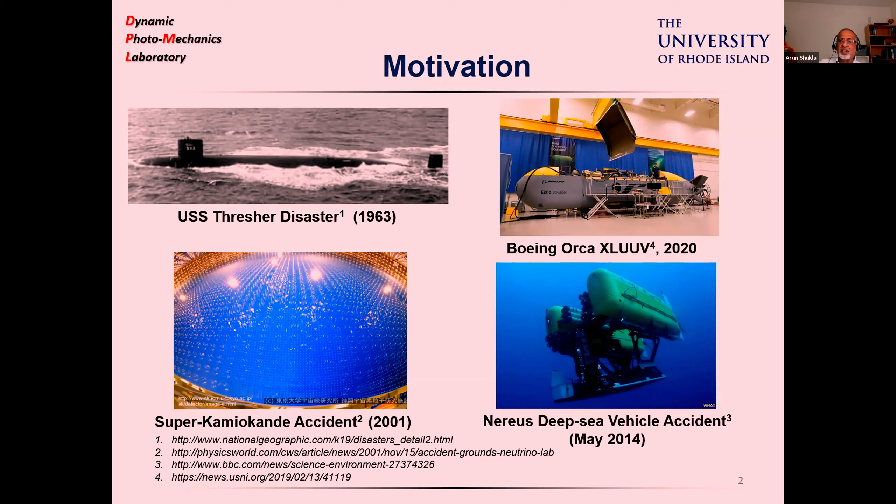Recently there's been a huge increase in activity for underwater unmanned vehicles. This vehicle on top is from a recent contract that Lockheed Martin and Boeing received to build extra-large unmanned underwater vehicles with composite materials. The interest is in deploying these unmanned vehicles underwater, both in terms of forward deployment, where they could be used after some years or right away. We believe that in the next 10-15 years, activity underwater will be similar to aircraft flying all over the place in air—these unmanned vehicles will number in the thousands in the oceans. This dramatic increase requires us to look at the performance of these vehicles from a mechanical engineering, mechanics point of view.

So the outline of my talk: I'll just talk briefly about this collapse problem, the implosion problem, and the experimental techniques that we are using, and then give you some examples of this implosion. I also want to show you some other examples of work we are doing recently, all dealing with underwater activities. I'll try to be simple and brief.

A lot of this work is published in literature, so if you want to know the details, you can look at them. I do want to mention that for the younger generation, there is a lot of scope in this underwater type of activity. So if you want to focus your research in that area, I don't think you will go wrong.

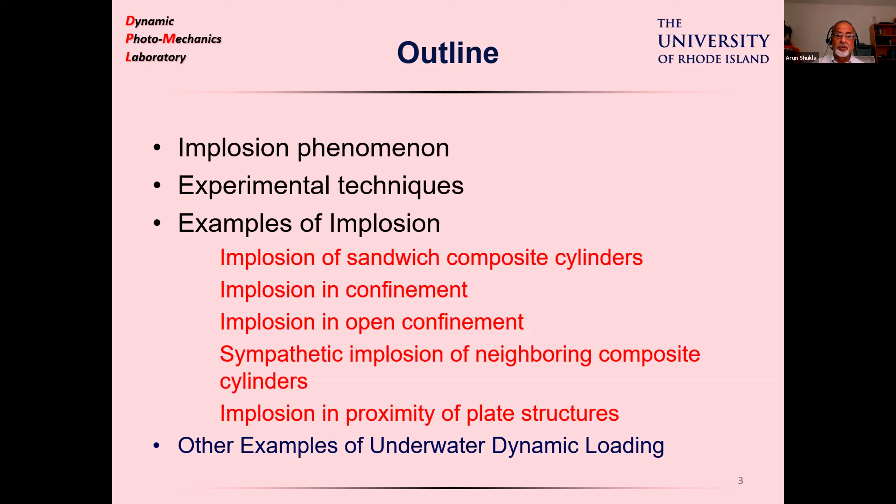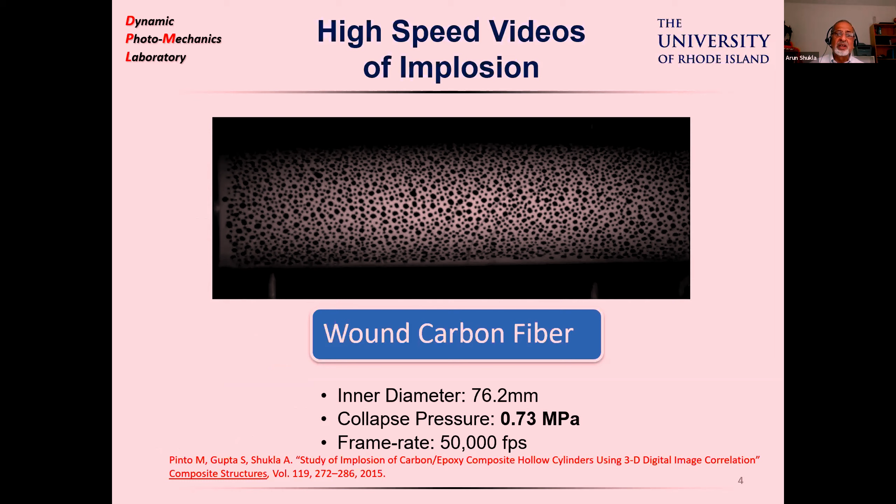So this implosion phenomenon, what you see in this movie, you'll see this tube here. This is a composite material tube, a carbon composite tube. We are immersing this in water at a certain depth, and it implodes, collapses. You'll see this implosion process here.

So this tube collapses in mode 3. You'll see 3 lobes and 3 valleys here, and it goes through catastrophic damage and deformation. In this process, it releases a pressure pulse that could be detrimental to neighboring structures, tubular structures, or plate structures next to it.

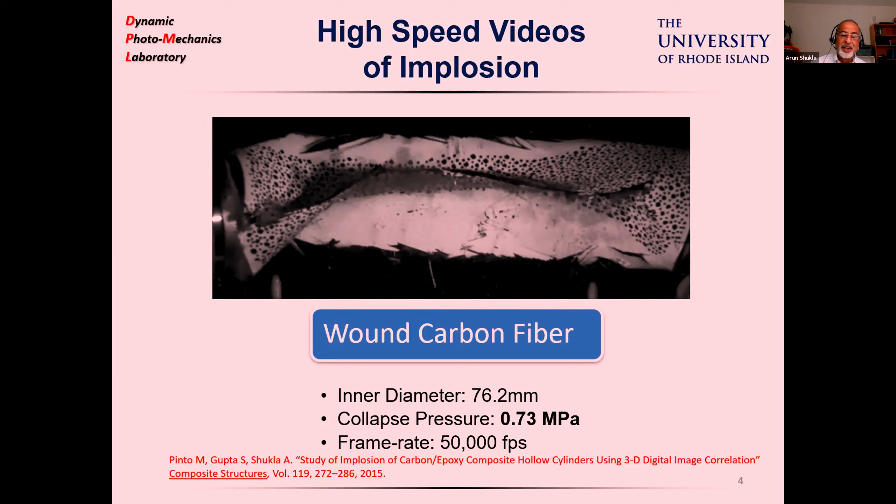I also want to tell you that it looks very dramatic here, but later on, after the experiment was over, the tube rebounded back to its almost original shape. So looking at that final shape of the tube, one would not feel or imagine this catastrophic nature of the collapse process.

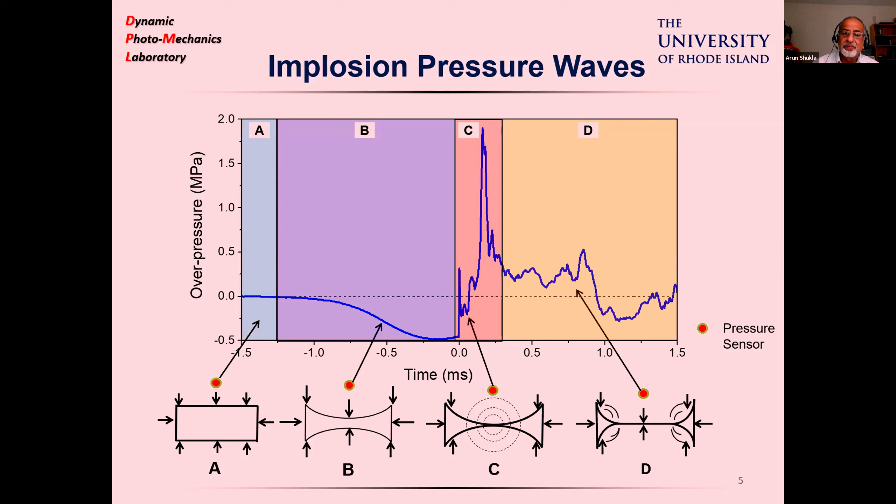There are very, very few studies in this area. I think this is probably the first one of its type on metallic cylinders, and we have done some more on composites. In glass, people have seen this phenomenon before.

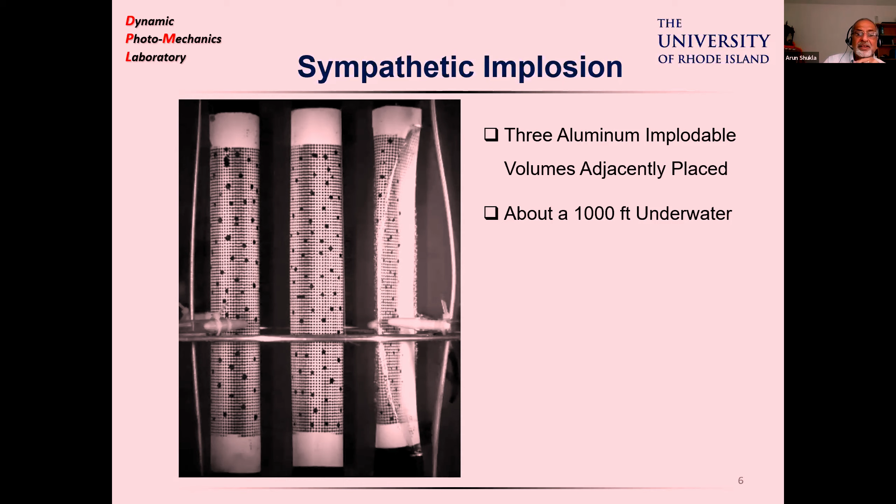So let me run this movie for you. Here you'll see this is collapsing now. You see this tube begin to bend here. And then because of that, this tube collapses, the shock wave propagates, and then the third tube is going to collapse.

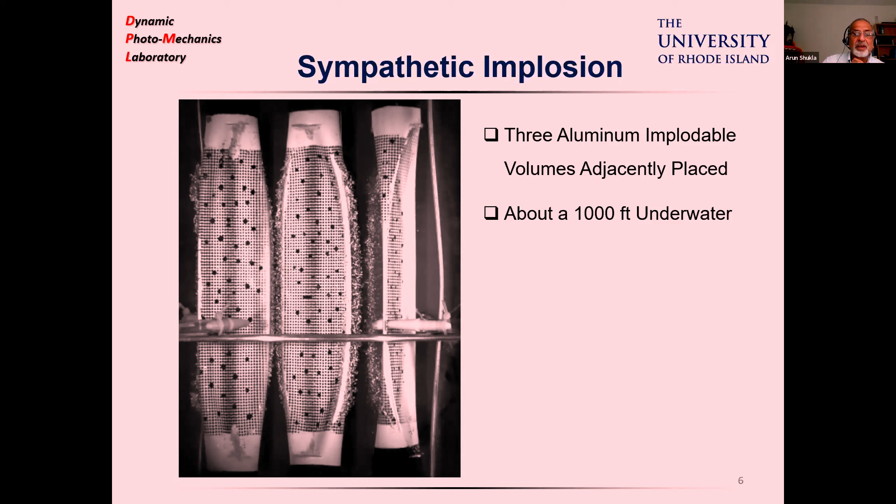This experiment was done, and it's a very high-speed phenomenon. The cameras we were using, if I remember exactly, were used at 100,000 frames per second or more. So we have slowed it down for you to observe this, but it's a very dynamic phenomenon—by the time you blink your eyes, the whole thing is over.

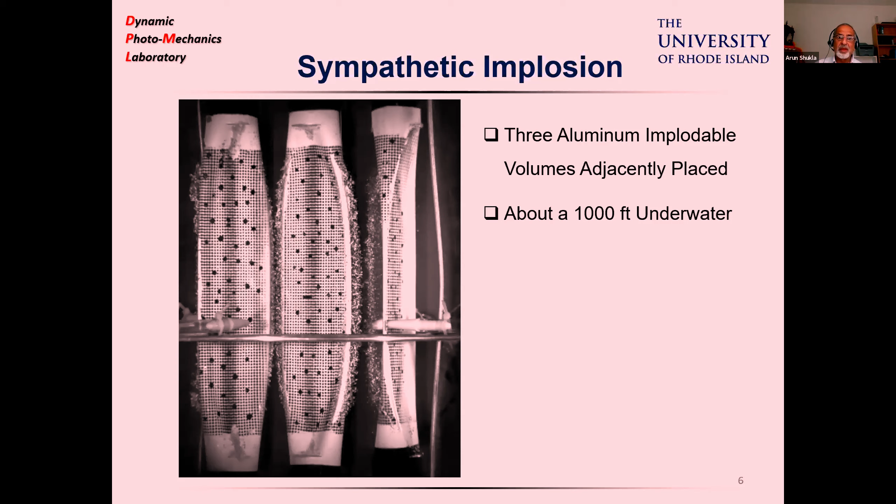So the technique that we use for looking at these structures is the digital image correlation technique. I think all of you probably know about this technique. Essentially, we put a speckle pattern on the specimens, and then we observe the movement of those speckle patterns in a stereo format. There are two cameras that look at it, and we get 3D deformation, particle velocities and strains from it.

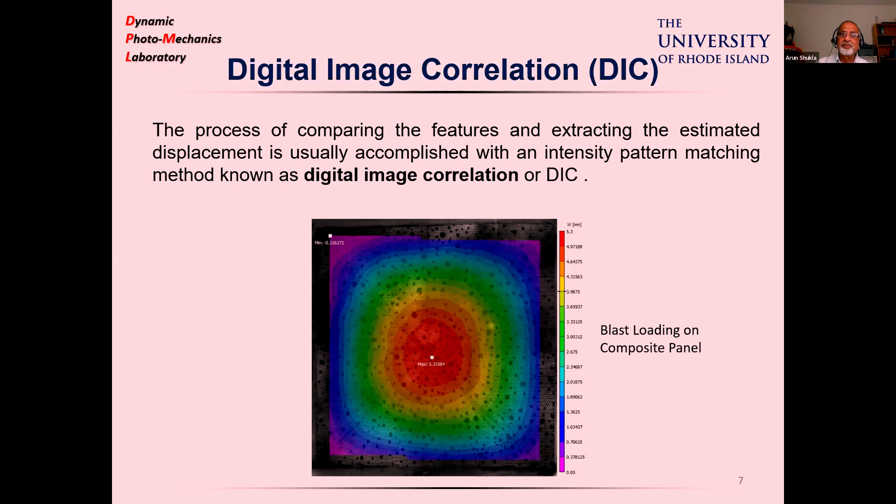Our experiments are conducted in a pressure vessel that is shown here. This setup that we have is somewhat unique. I have not seen something like this anywhere else in all my visits all over the world. The uniqueness comes not because of the pressure vessel itself. This vessel we can pressurize to about 1,000 PSI. We fill it with water, and we have compressed air on top, which we use to pressurize it. But the uniqueness comes because of the optics that we use with it to probe the imploding structures.

We use high-speed cameras. There are ports on this spherical pressure vessel—8 ports—and we use high-speed cameras in those ports to observe this phenomenon. And the optics that we are using, this digital image correlation technique, I think we were the first ones to look at this technique for underwater dynamic applications.

About 5 years back or so, we published a paper in the Proceedings of the Royal Society with our findings, and the technique is very robust and works very nicely for us. It is a little bit more difficult to use for underwater applications because the water changes the optical path of the light beam there. So it's a little bit more difficult, but once everything is calibrated properly, it works very well.

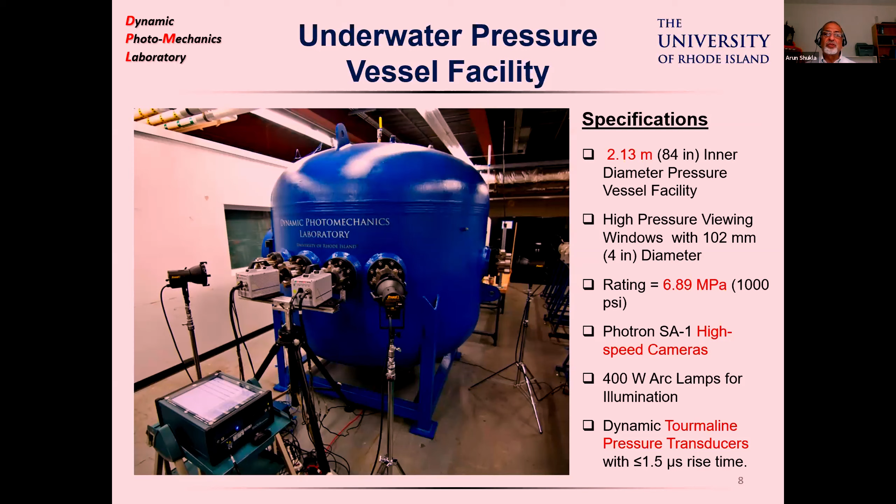In the tank itself, we have many pressure sensors. These are dynamic pressure sensors that are used to get pressures during the implosion process.

The other setup that we use, the large tank that I showed you before this, we consider to be an infinite amount of energy as compared to the small energy used in imploding the cylinder. So for us, that is like an ocean environment. But there are many applications where we want a limited amount of energy to cause the implosion process.

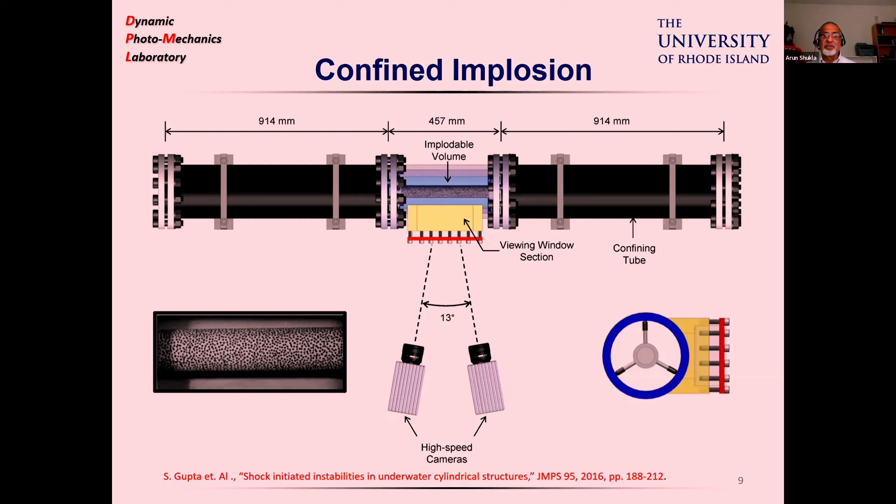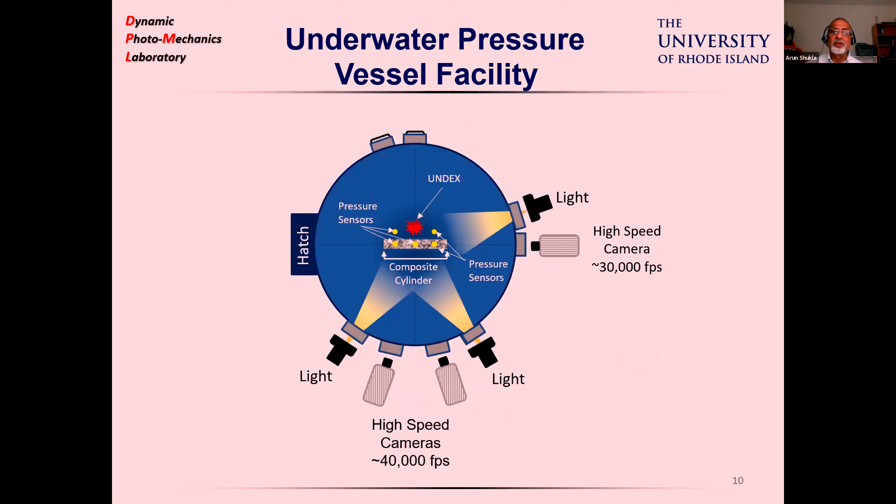This is how the tank looks from inside. This is our imploding cylinder. We have pressure sensors located all over the place, but sometimes we implode these cylinders using hydrostatic pressure, and other times we use explosives in the tank, or some combination of explosive and hydrostatic pressure to implode these cylinders. So we can look at these structural collapse problems under highly dynamic conditions of external loading also.

So when we started this work, I think we spent a lot of time, maybe almost 8 to 10 months, trying to develop this DIC technique for underwater applications. After we felt we were successful with it, we did some simple experiments that we called calibration experiments to see if the technique was working well.

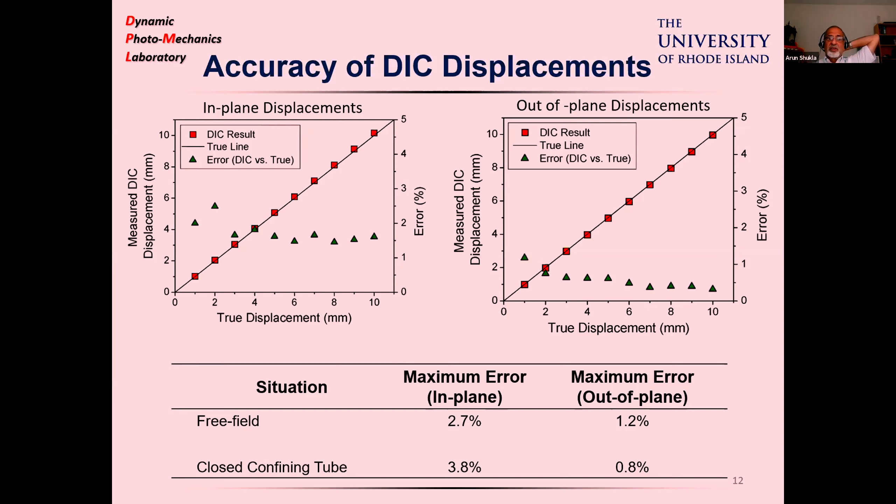We have to remember that the DIC technique has some inherent errors. If you take an image without doing anything to the specimen and look at the DIC pattern, you'll find displacements of the order of some percentage. So there's inherent error, but for us as experimentalists, looking at this extremely difficult problem of an event happening under combinations of extreme environments, we were very happy with this. I'll give you an example.

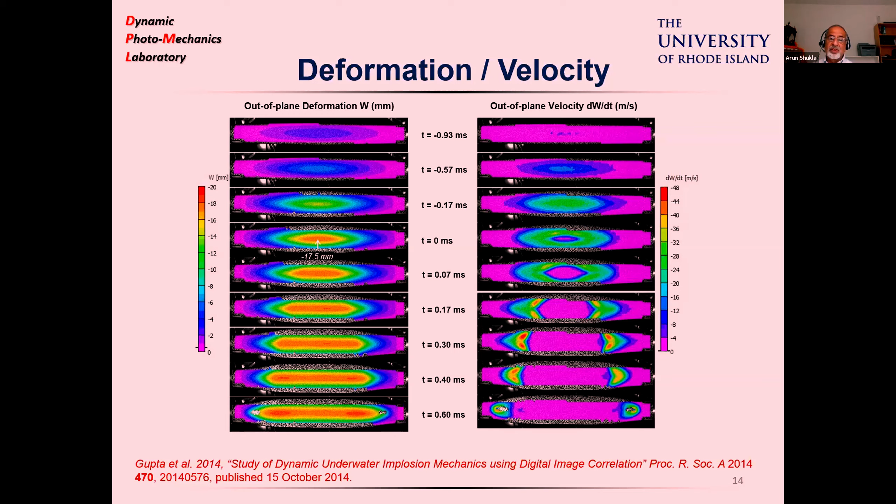There's some other physics involved here, but that's all discussed in this paper. I think this was the first paper published looking at dynamic underwater phenomena using DIC techniques. It worked very well, and we were quite happy. Since then, we've been using it to look at many different problems.

Our focus these days is mostly on composite materials. Composites have been used in the past, but nowadays they're becoming more common in underwater applications. In 1954, the submarine USS Halfbeak used composites in fair water cowlings - these surround the submarine sails. They were tested after 11 years and found to be in good condition; 11 years of exposure to seawater didn't reduce the properties much. There was a decrease of about 8-9% in strength values.

Currently, all submarine bow domes - the material of choice for these sonar domes - are made from composite materials. They're very large, 34 feet across and about 43,000 pounds. I think UUVs, unmanned underwater vehicles, will be the future for underwater applications, and composite materials are the choice material for these structures. Our focus is mostly on composite materials, though we've done some work on metallics as well.

Very quickly, I'll show you some examples: collapse in open ocean environment, collapse in an enclosed container, collapse where one side is exposed to the ocean and the rest is confined - these are all of importance to the naval industry. Then two tubular structures collapsing, one next to the other, as I showed you before with the aluminum tubes. My student Shyamal Kishore presented yesterday on the interaction of an imploding cylinder with a nearby structure, especially with water on both sides of the plate.

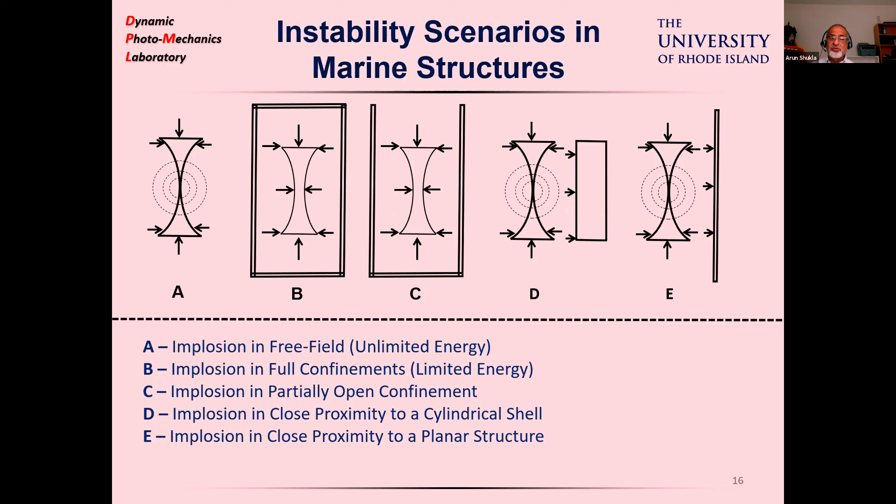I'll just say a few quick words on these. For the open ocean environment, there's a lot of energy available. I'll focus more on cylinders that are sandwich structures or double hull structures, and I'll show you this - we're looking at cylinders fabricated like this.

We have an outer shell, an inner shell, and a filler material in between. If you bond this filler material to the two surfaces of these shells, then the terminology used to describe the cylinder is a sandwich structure. If there is no bonding between them, we just call it a double hull structure.

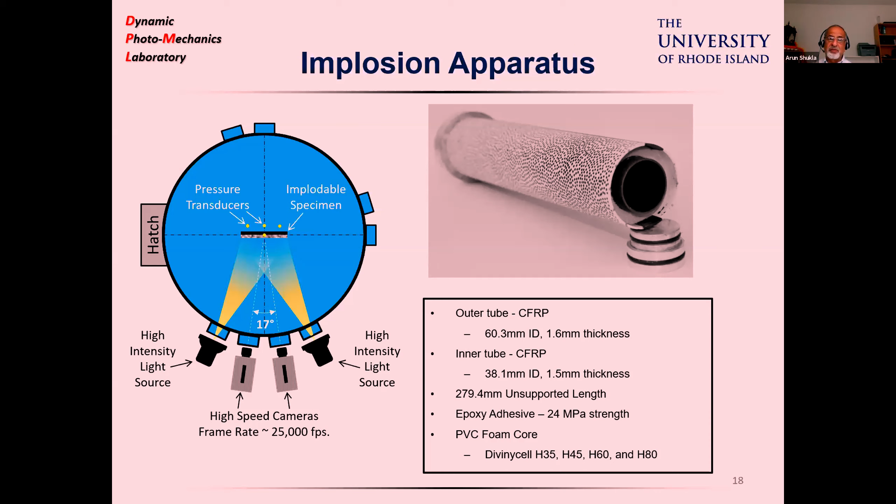When it's bonded, it will resist shear deformations; when it's not bonded, it will not resist shear deformations. If you look at the collapse of these cylinders and plot the change in radius on the vertical axis as a function of pressure, for an elastic buckling problem you should see a linear change in radius as a function of pressure, and at some stage there'll be instability and it will collapse.

But for these two cases, with filler material bonded or unbonded, the collapse is actually controlled more by perturbations that happen on the surface of these cylinders, and they dictate when collapse will happen. Those perturbations are suppressed when bonded compared to when not bonded. So plotting change in radius for a double hull structure versus a sandwich structure, the sandwich structure collapses at a much higher pressure compared to the double hull structure, which shows more perturbations.

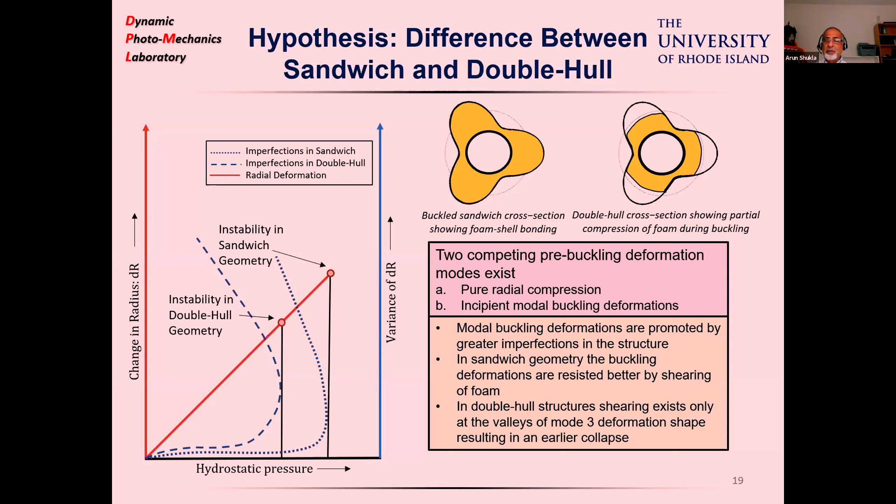Now we are able to measure these perturbations in our experiments, and I'll show you in the slide here. As the structure is submerged in water deeper and deeper, you start seeing localized areas of deformation. These are the incipient modal deformation points, and this is where the buckling starts. We are able to make measurements of this for these structures, and this is what dictates buckling in those problems.

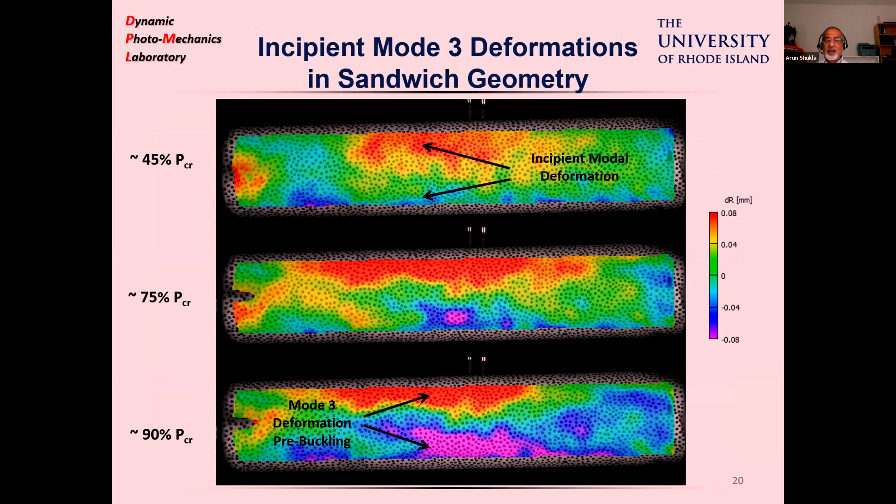If you look at the buckling pressure, or increase in buckling pressure, as a function of the different types of filler materials, these are different density foams, 5 different density forms that we used. The double hull structures where the foam is not bonded are down here, and when you bond it, the buckling pressure certainly increases. There's a lot of work in here, I'm just showing you in 1 or 2 minutes.

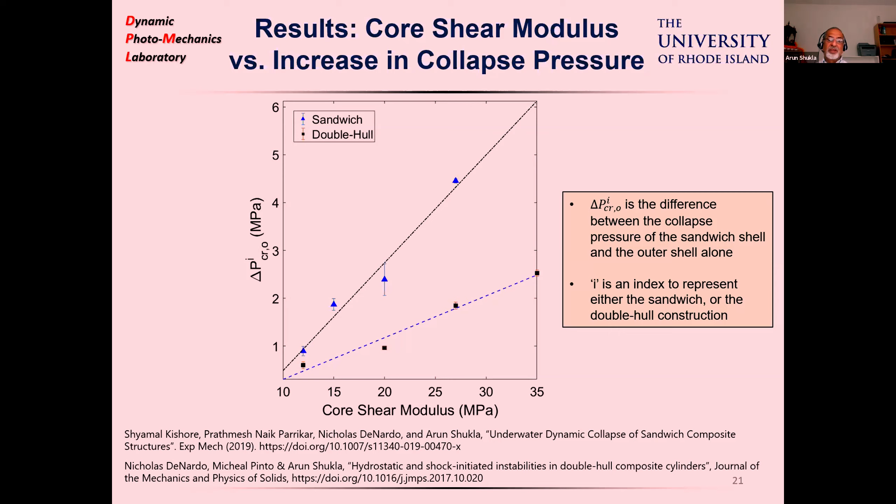As you can see, we published this in the Journal of Mechanics and Physics of Solids and in Experimental Mechanics last year, so you can get a lot more details in that work.

One of the things we observed was that when the two cylinders collapse, if the axis of collapse is the minor axis and they are collinear, then the whole collapse happens in one shot. The whole cylinder will collapse, both of them collapsing in one shot.

Whereas if these two are not aligned, then there is some dwell time: the top cylinder collapses, and the second one collapses a little bit later than the top one. This dwell time is extremely important in some naval applications, and if one can control this dwell time, that makes a big difference — it's important for the Navy to know that.

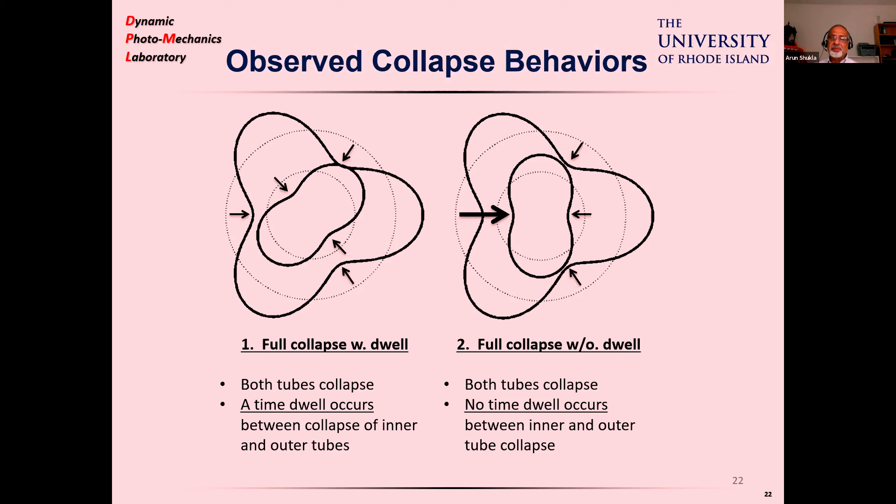So some of our emphasis was on looking at these dwell times. This is the collapse phenomena you see here: this one was with dwell, this one was without dwell. This happens so fast you may not be able to see it, but this is how the two tubes collapse — both of them are collapsing. There was a small dwell in that one, and this one collapsed in one shot.

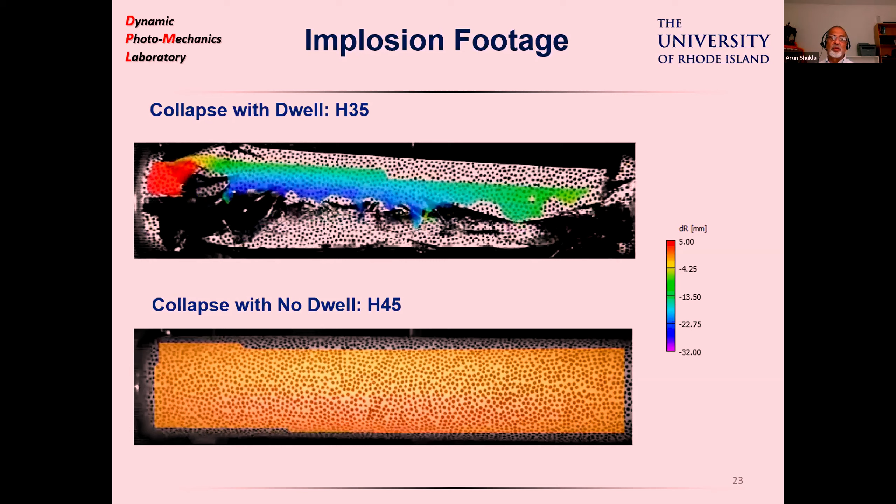Those papers have more details, so if anybody is interested, you can look them up. One thing I wanted to point out here: in this collapse, this is the specimen shown here.

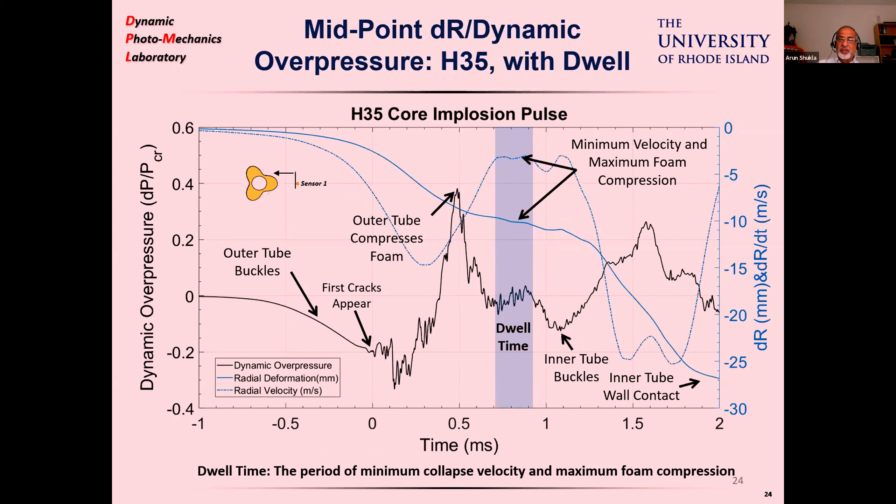And then there's a small dwell time, and the inside cylinder also collapses. Then you see another peak coming out. So there are two implosion phenomena here, and both of them have their own pressure signatures in this problem.

I'm going to show you a second example of this implosion of this composite in a limited energy environment. Here we are doing these experiments in another tube. This tube has all the water in it, and inside there is a specimen that we are looking at.

So, depending on the diameter of this inside specimen that we have, the specimen may start the instability process but may not be able to collapse completely, because if this is larger in size, the amount of energy in this whole space here will be smaller.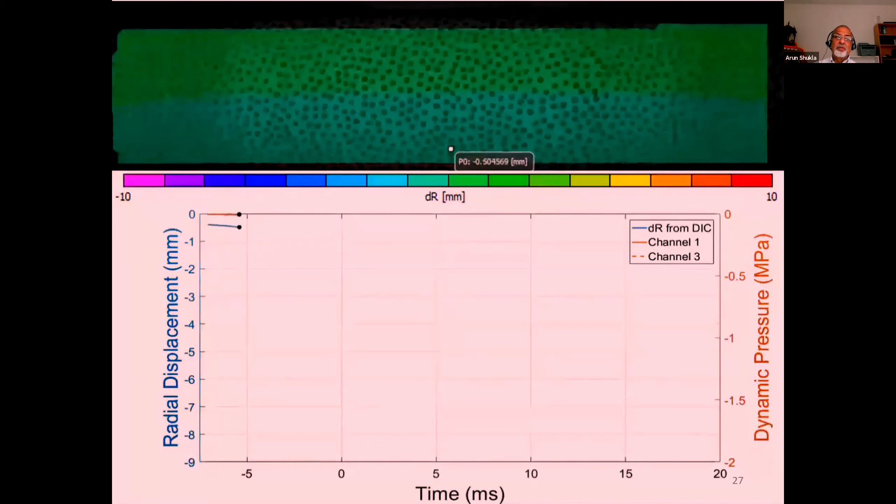Look at the blue color here. This is the displacement, and this is the pressure profile. All this data, very nice data, comes out from these experiments. In this particular case, the cylinder undergoes vibrations but doesn't collapse.

Without going into too much detail, there's a lot of interest in this vibration problem for the underwater community, because when structures vibrate underwater, they do leave a signature, and that could expose them... anyway, so this is more from the experimental mechanics point of view.

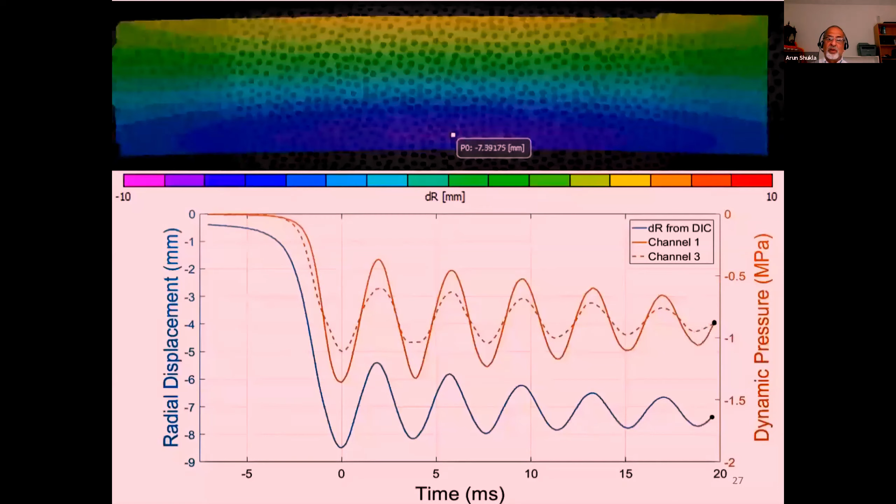I think we can capture some really nice data from experiments like this. Now we're plotting the displacement here. You could also plot other quantities of interest, like particle velocities or strains or something like that.

So in the case of smaller diameter tubes here, inside here, this smaller diameter tube will collapse completely. And this is very interesting.

And this part, the liquid being in tension, is kind of uncommon for people because liquids are usually in compression, not in tension.

But it reminded me of a story when I was a graduate student taking a class with Professor George Irwin on fracture mechanics. At that time, Professor Orowan from MIT was visiting—Professor Orowan is no longer with us, but he was a giant in the field of plasticity. He told us that during his comprehensive exam, the committee asked him a question: how will you measure the tensile strength of a liquid?

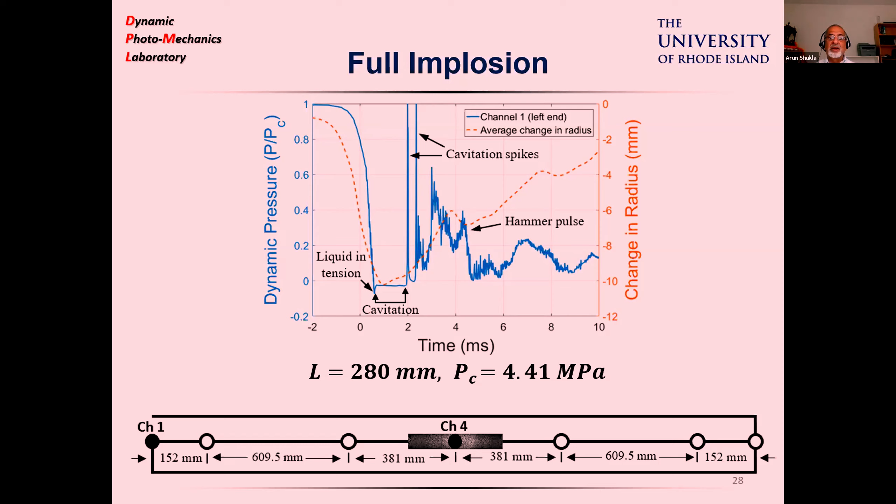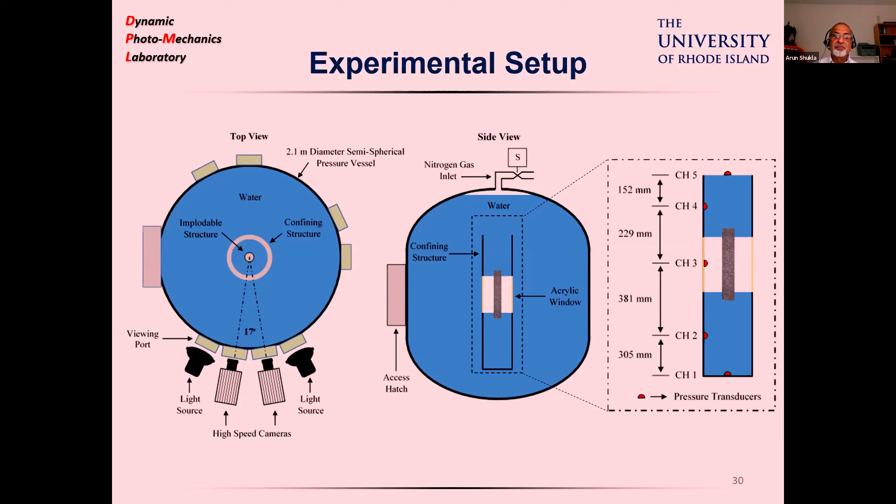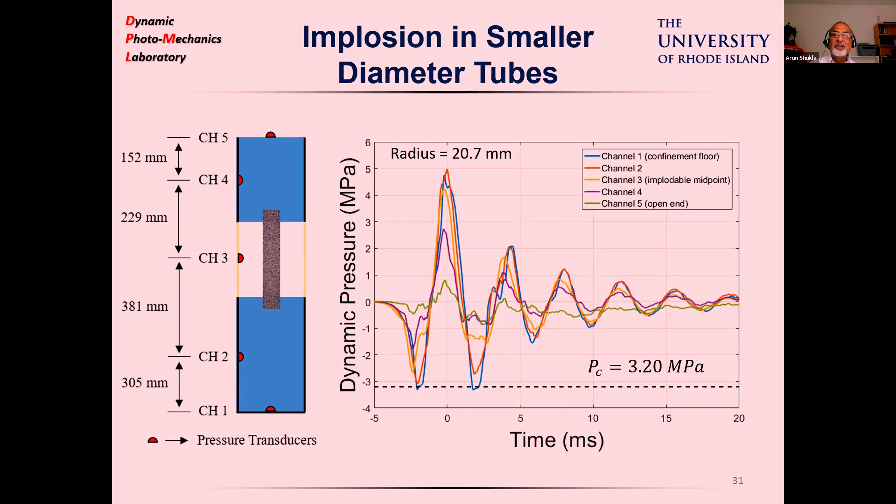Now, this is something unique. When the student showed me these results, I didn't believe him and asked him to repeat the experiment. He did it again and got the same results. I asked him to put three sensors here, not one, and all of them showed cavitation. I don't know exactly how to explain that, but this may be a problem for fluid mechanics people to help us with these CFD type simulations. But we do see cavitation both at the bottom as well as the top of this container.

Now I want to show you quickly the example of two cylinders next to each other in composite material. We did experiments in this big tank again with two composite cylinders, one slightly longer than the other. Because of the change in length, the collapse pressures of the two are slightly different. So we put these in the tank and pressurize it so the first one collapses, and then we look at the response of the second cylinder.

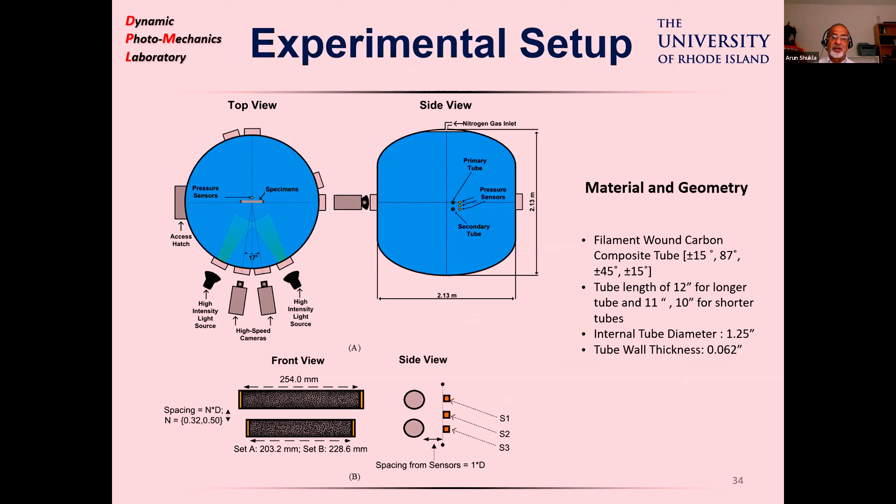Here's what we think is happening: these are the two cylinders. The longer one collapses first, we call this the primary tube. As this collapses, the pressure next to it drops, so the second tube's surface is kind of sucked into it. Once the collapse process of the first tube is complete, it emanates a pressure pulse, and starts moving this surface outwards in this direction.

There are two possibilities: this second cylinder could also collapse completely, or could go into a vibration mode. These vibrations happen both in bending as well as breathing modes. We are almost done writing this paper, and I tell you, this is a very interesting problem — using DIC to distinguish between these bending and breathing modes itself is a challenge.

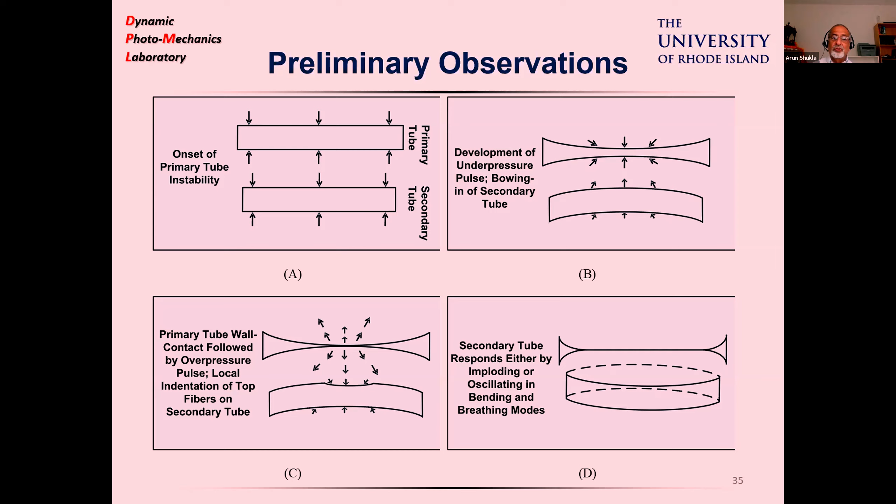But the student, again, Shamal Kishore, who's probably attending this conference also, did this work, and very soon we should be sending this out for publication.

Again, a lot of interest in this work for the oil industry as well as the Navy industry.

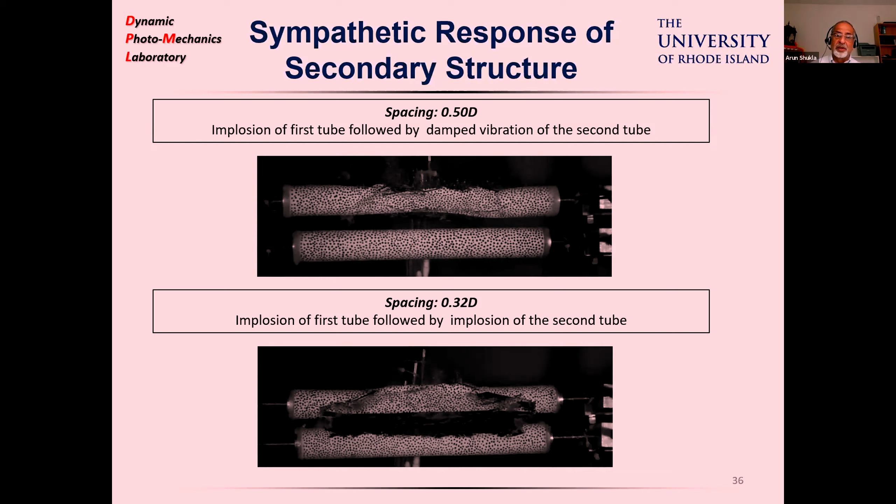Now the distance is one thing, but we observed very carefully, and we have made some careful measurements, that what also dictates the collapse of the second tube is how the first tube collapses, the orientation of the first tube. Depending on if the first tube collapses in this fashion versus this fashion, the pressure profile generated will be very different. Both are mode 1 collapse, but the orientation is different. So depending on how they collapse, this second tube will see a very different pressure field. In the paper we are preparing, this is all discussed.

Next I'm going to say a few words about the fluid structure interaction of dynamic pressure pulses with submerged plates. If you have an explosion—in this case I'm not showing explosion, but say an imploding cylinder next to a structure—how will that structure react to this? This was presented by my student in depth yesterday, but I'll say just a few words here. This is our setup inside this big spherical tank.

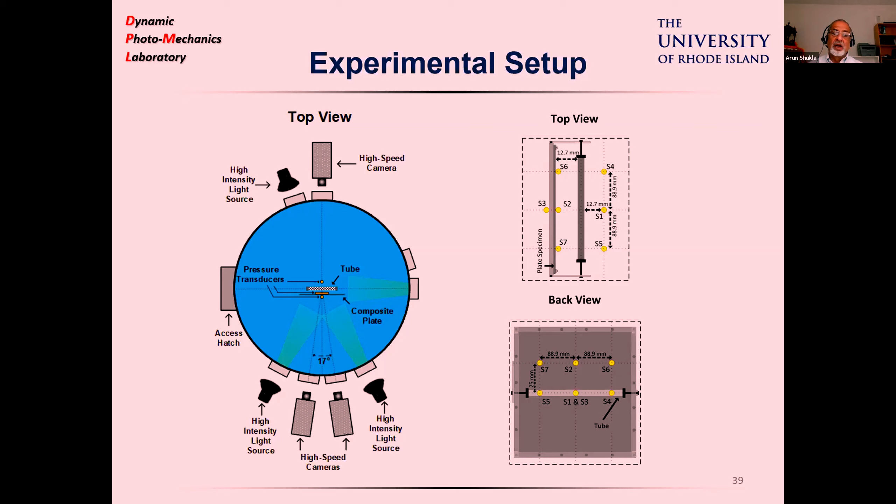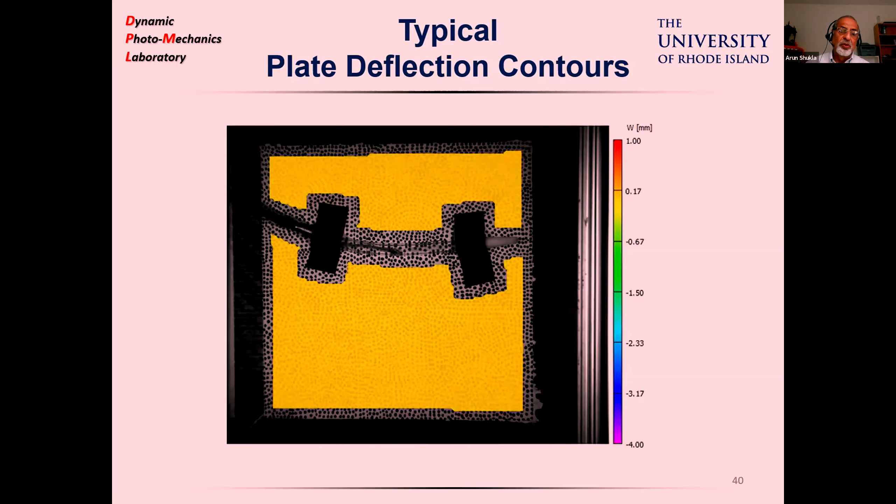But here is a movie. This is the plate, and the implodable cylinder is on the other side of this plate, laid horizontally. When I run this movie, you'll see the cylinder imploding on the other side, and these are all the displacement contours that develop on this plate. This is of interest, but of more interest is the pressure profile that happens on this side of the plate.

In order to understand that, we went through some modeling. We started with Taylor's description of this fluid structure interaction and developed different models incorporating plate bending and afterflow fluid in the analysis. My student presented this yesterday, and the predictions from the model are pretty good. We're looking here at the transmitted pressure profiles behind the plate—pressure on the vertical axis, time on the horizontal axis, for thin plates and thick plates.

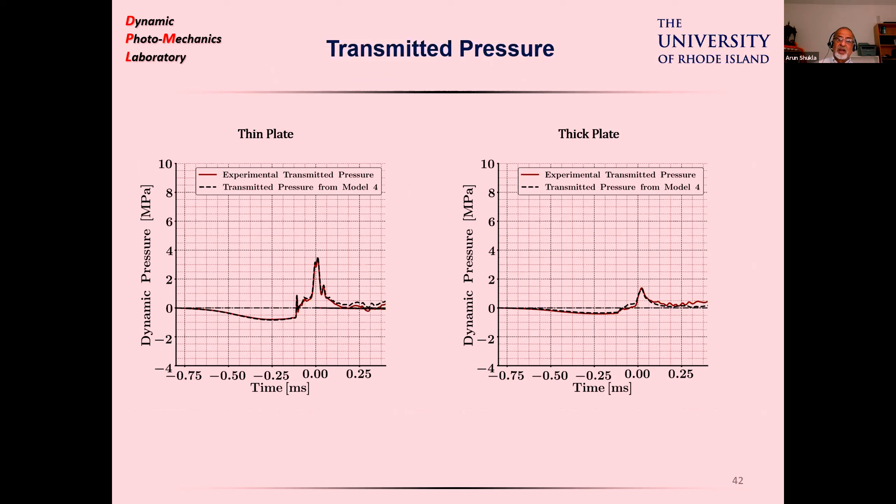And the experimental data is in red. The dotted line gives us the modeling part, and they match very well. So this is again, we have this paper in JMPS 2-3 months back.

Just want to say a few words on some recent work we have done where we have looked at soft materials, our interest in these foam type of materials. We have done some work for Naval Submarine Medical Research Labs that I probably won't be able to show you here, but we are looking at organs, things like lungs and intestines.

Professor Shukla, sorry to interrupt, but we have 5 minutes. Sure, we'll take some questions after that.

Thanks. So this soft material work, I just want to show you very quickly for underwater applications. Here is a PVC foam material that is underwater, and again we are using DIC to observe this. Our interest is in getting the constitutive behavior of this material, so pressure on the vertical axis, and we are plotting volume on the horizontal axis. So you see, this is a movie of this foam material underwater.

This is hydrostatic collapse under quasi-static loading. Working with the DIC for underwater application was a little challenging with our cameras and the water and the cylindrical vessel, but we got some good results. You see pressure as a function of strain for several different types of foams, and you can get the hydraulic crush points and densification regions very nicely.

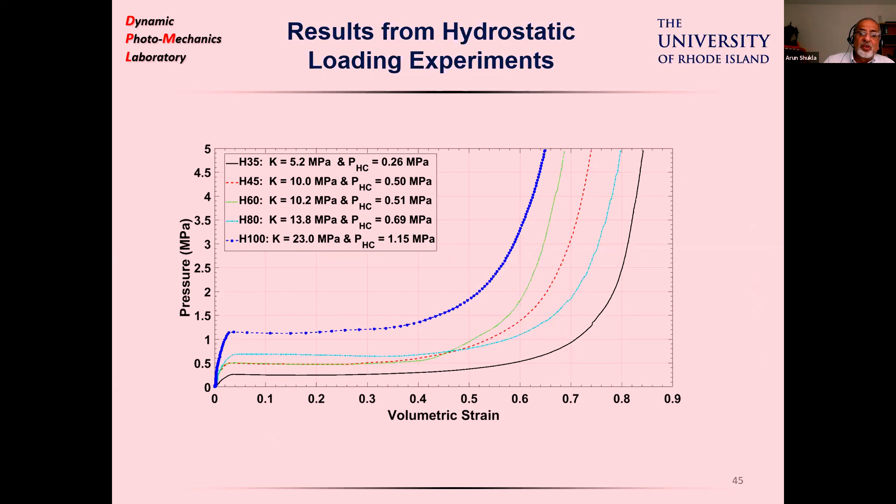We are using high-speed photography to visualize this, high-speed cameras to look at the specimen. This is the movie for high-speed application, shock coming from the left side and loading the specimen. Then again, we can look at the pressure as a function of time plot, or volumetric strain as a function of time plot, the red curve here.

We see that there is a delay, so when there is a delay, this is the pressure pulse. It comes at this time, and then this is the deformation. So there is a delay in the deformation process, certainly because of the inertia effects.

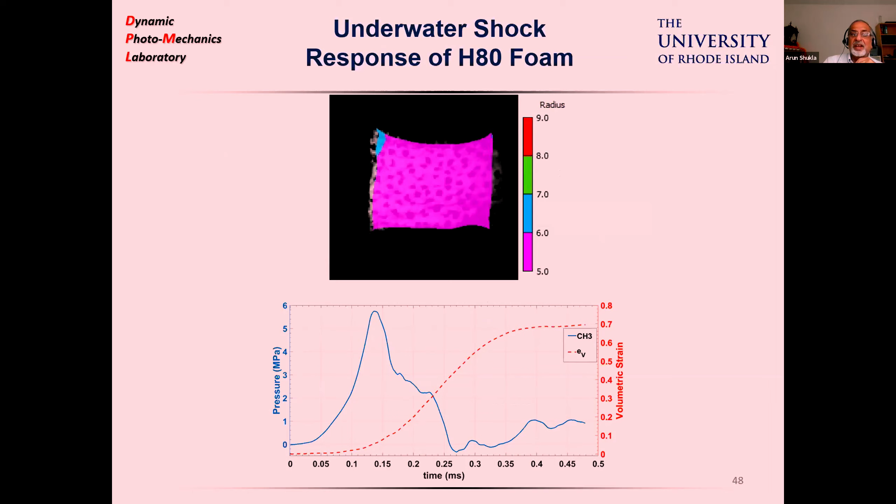These are all detailed in these two papers that I showed you. The dynamic paper, the Impact Engineering Journal came out last year, and this is the quasi-static work here.

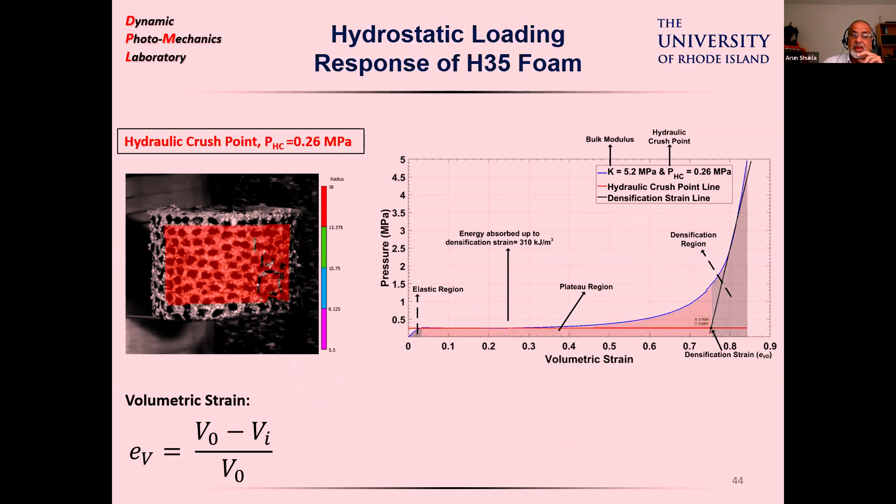Our hypothesis, or at least the thought here, was that when the explosive pulse comes and hits, if you are using pressure measurements outside the skull to determine how much injury is inside, that may not be right. One has to make measurements of pressure right inside the skull.

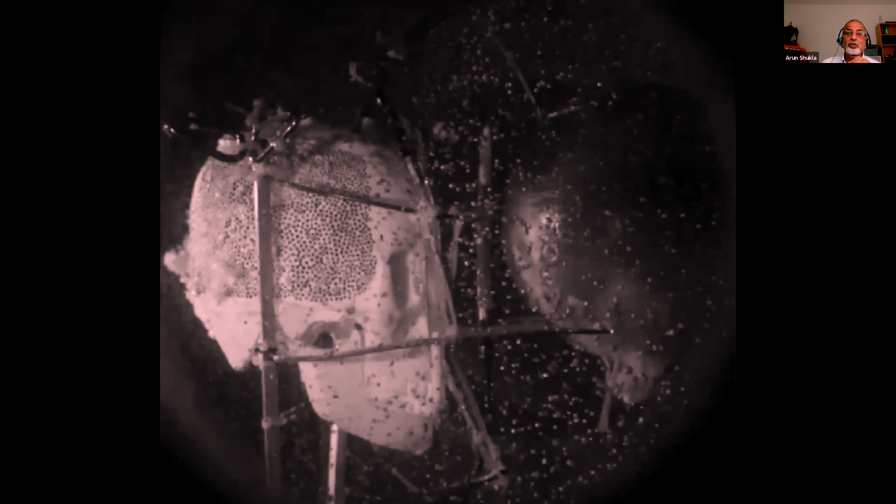When I fire this explosive, you'll see the explosive hit with a pulse, and a bubble will form and hit the skull. There will also be a lot of cavitation visible. There's an explosion, the water oozes out from the lower part, and the two eyeballs come out along with the water. This movie has been slowed down a lot, but the water coming out from the eyeballs is at a very high velocity.

So there are a lot of interesting problems that one can study here. This was just a demonstration experiment.

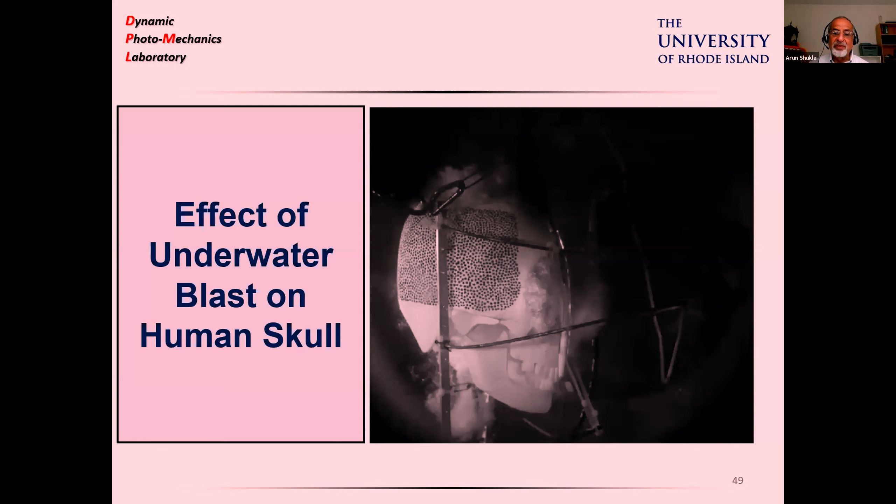We have done some work on pressure measurements, pressure as a function of time, inside the skull and outside the skull. You look at the amplitudes here, 15, 17 megapascals. This is almost 33 megapascals here. So there's a big difference.

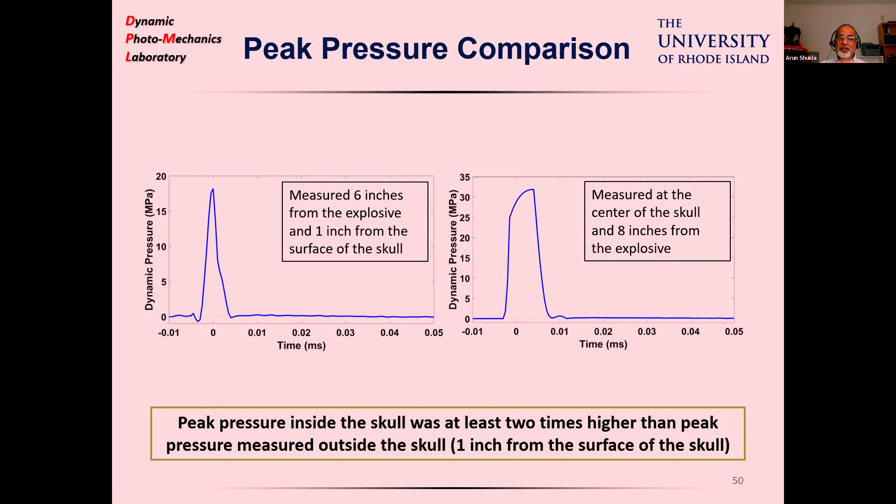So here is the DIC data that we get, and I'm not going to show everything, but we can get some very nice deformation data on the skull here.

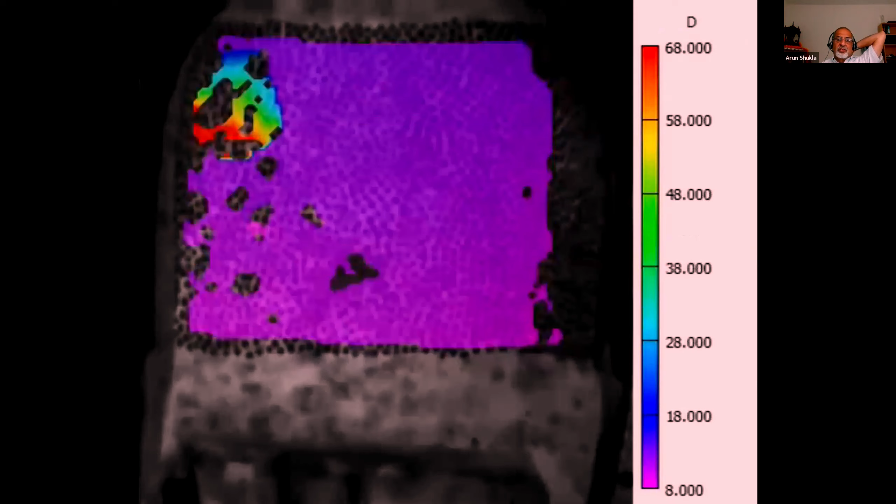Our work is mostly in that area, but we have a pretty large activity with about 70 faculty members involved and several different companies. So there is a lot of work. If you want to see more details, you can go on this website.

And lastly, I just want to acknowledge that a lot of this work that I showed you was funded by the Office of Naval Research from different grants.

And of course, the graduate students are the key to all this work. They work very hard, and we of course present it and get the credit, but they are the real workers here. I've been very fortunate in my 40 years of career to have some very good graduate students. They think outside the box and come up with new ideas that really are the ones that keep the research going forward.

Thank you very much.

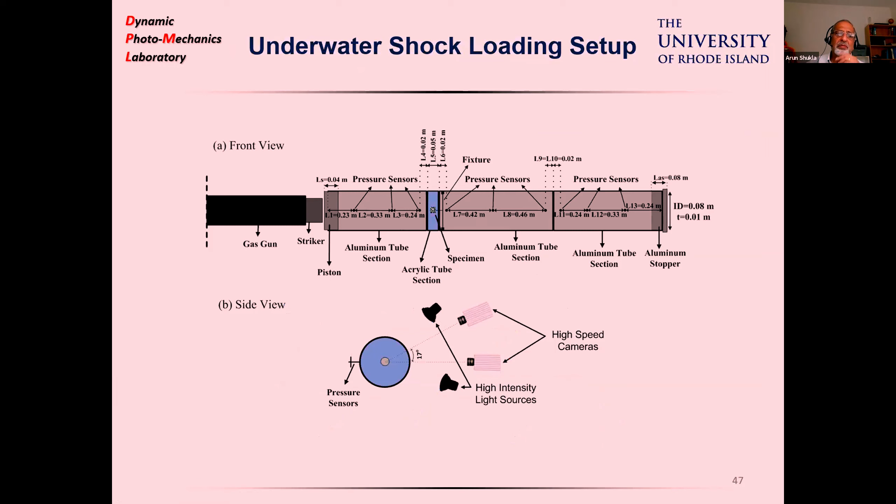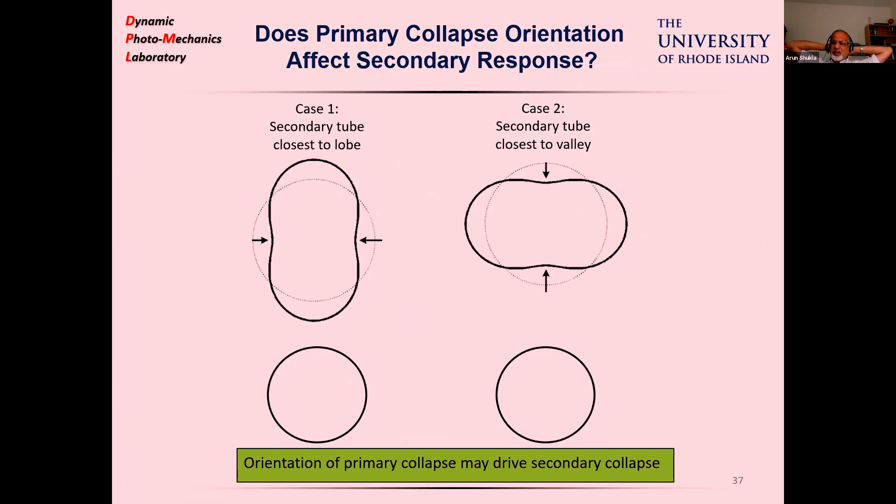Let me see if I can go back. I think I don't have control of my screen, but anyway, in the pressure profiles that we had, we had the peak pressures. I won't go to that, but anyway, the peak pressures we were seeing on the pressure sensors, because the cavitation was happening on the pressure sensors themselves.

So when these cavitation bubbles collapse on pressure sensors, you get very large spikes, 40 to 50 megapascals. At first I thought they were some kind of error or discrepancy with the sensor itself, but those were bubbles collapsing on the sensors, and we were able to photograph them. Ah, okay, thank you.

Thank you. We have time for one last quick question from Naveen. Naveen, do you want to go ahead? Hello sir, a nice presentation from your side. I'm very fascinated by your experimental setup.

My question is related to your high-speed camera orientation. You oriented it outside the setup at an angle of 17 degrees. I would like to know what challenges you faced for the orientation perspective and alignment with the specimen, so that you could make proper images of it.

That's a very important question, and for experimental mechanics people, one has to be careful with that. When you do your calibration process, the included angle between the cameras is very important, and the angle relative to the surface of the window is important also. The included angles I showed in my images were kind of a threshold of the angles we could use in our experiments. Beyond that, the calibration errors would increase quite a bit, so one has to be careful.